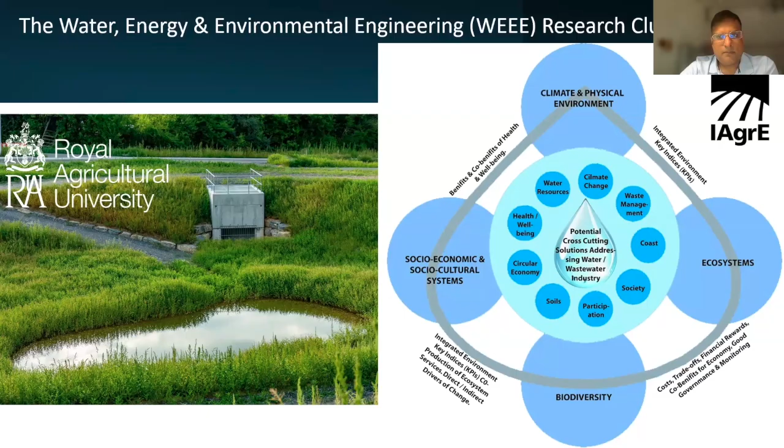So 2.5 years ago, I joined the Royal Ag alongside my post with WRC, and I set up the Water, Energy and Environmental Engineering Research Cluster with postgraduate and PhD students, specifically looking at how we deal with natural environments, runoff, capture, and the importance of water and wastewater relationships for farms and the farming industry, and how best we can look at it from a circular perspective. A lot of times, that water is captured and conveyed or stored before lorries and trucks pump it away from your on-farm produced water on site.

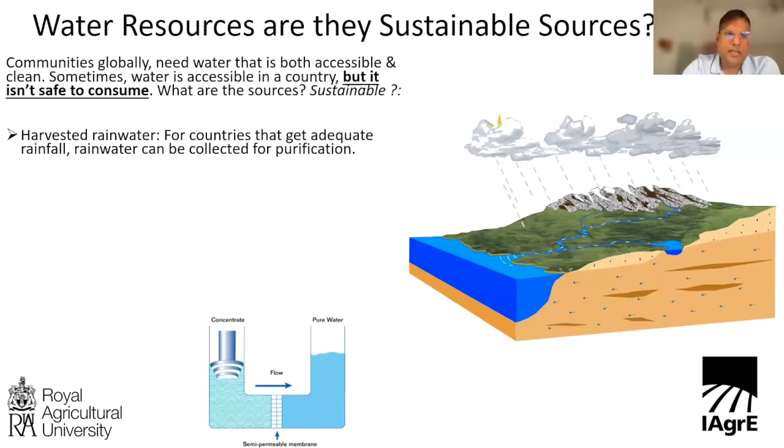It's not working. So you have to look at more realistic ways of providing that water resource sustainably. And in terms of dealing with it, capturing it. Yes, rainwater harvesting is there, but what happens now when you have at least 2 weeks of non-precipitation levels? The reliability is questioned. Capturing that from other sources, so the wastewater coming from, yes, it will be varying levels

of contamination. And for those who look at the very nice fun show, Clarkson's Farm, you would see the farm wastewater has to achieve biological steps in terms of the total coliforms, the fecal coliforms, and the bacteria that must be removed, especially when it's feeding into your poultry farms as well as your dairy farms.

And then there's grey water reuse as well, originating from other aspects, which can also be treated and reused for non-potable consumption and also further treatment for farm water supply. For example, going through detailed filtration and disinfection prior to reuse on farms.

So what happens to the water used in farming and agriculture? Quite often, people don't realize that the agricultural sector uses 70% of fresh water resources globally. So in the UK, that's not the statistic. It's less than 30% from the fresh water supply that goes through to the agricultural sectors.

But when you talk about Canada and the United States, it's closer to 70% of fresh water abstracted for the agricultural industries. And higher percentages from both groundwater abstraction and abstraction from your rivers and so on as well when you talk about India and China.

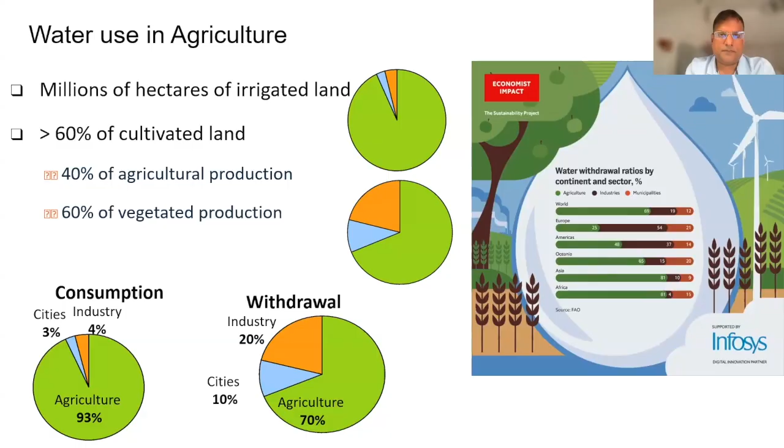versus vegetated produce. And when you look at the pie charts, consumption versus withdrawal, agriculture dominates in most countries, not so much in the UK, but globally, the agricultural sector dominates in terms of the abstraction rates of fresh water resources versus your consumption rates when compared to urban consumption, other industries, etc. So there's an agricultural water challenge for sure, 100%.

And there must be a greater focus on wastewater treatment and wastewater capture for reuse purposes. And when you look at farms for poultry, dairy, and stables with the equine, large volumes of wastewater are nutrient-rich, which can be reused in terms of capturing that phosphorus and nutrients as well. And from a research aspect, there's more to be done when we talk about recovering these valuable resources from a water, food, energy perspective. And some of these challenges, yes, we are experiencing.

Earlier this week on either ITV or BBC, one of the farms in Wales, the farm owner presented that the dairy farm dropped in production of milk from 5,000 liters to 1,000 liters because of the drier conditions. The cows are not accustomed to that, so there's less consumption, but also the growth of hay and other vegetated goods has reduced significantly. So there's a wider societal benefit when we talk about wastewater management and water reuse.

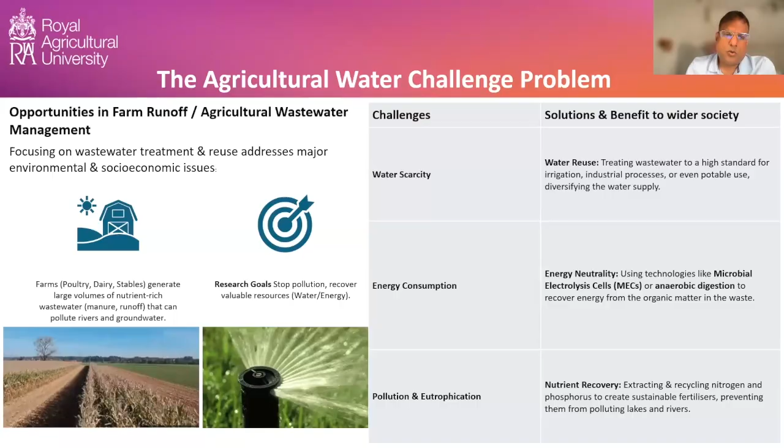And the technologies are improving. And some of the case studies I want to talk about in today's presentation is the use of microbial electrolysis cells and microbial fuel cells, which we are looking at alongside nature-based solutions in terms of treating that wastewater on-site and also creating bioenergy.

So constructed wetlands have been around for a long time, also known as engineered wetlands or engineered hydrosystems, using the natural vegetation, and it's important to not bring foreign species and invasive species when you talk about vegetated and constructed wetlands. So there are a lot of native plants here in the UK and Ireland, and we have been looking for more than 40 years at the applications of surface flow wetlands and subsurface flow wetlands dealing with runoff, especially agricultural runoff.

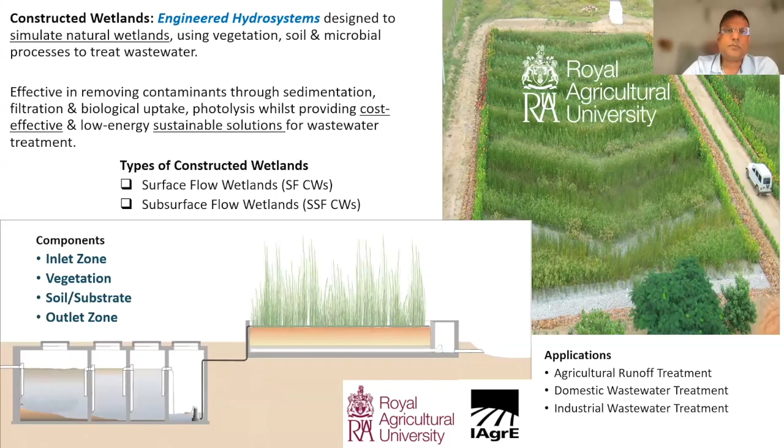So it does work, but there are negatives and positives towards constructed wetlands. And of course, one of the big drawbacks is the land use and land application when it comes to constructed wetlands on farmland. So one of the key focused areas from my water, energy, and environmental engineering research cluster at Royal Ag was looking at decentralized wastewater treatment systems. And in this photo and infographic, you can see a combination from a farm building flowing through different stages for proper reuse.

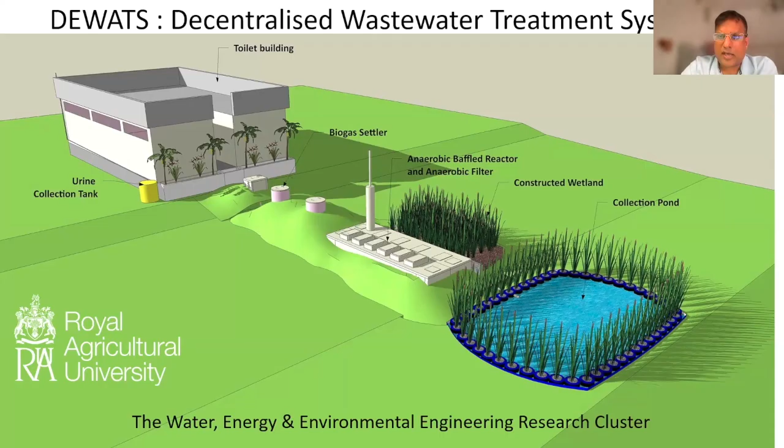And the amount of reduction in your organic matter is in the high 80s to 90% when you have two stages of treatment, as shown on this infographic, a combination of constructed wetlands, biofilters, and also anaerobic digestion systems in terms of the application. But of course, the cost is there, and the land use and land space is another question mark. But these technologies can work, and they reduce the amount of nutrients; they entrap pollutants, both organic and inorganic, within the constructed wetlands and biofilters.

And there are wonderful applications for constructed wetlands, both in vertical flow and horizontal flow mechanisms. A lot of the research that we're looking at is improving the sub-base materials, not using virgin aggregate, but looking more now at biochar and chitosan, which is crushed seafood waste from your crabs and other seashells, ground into a soil or media to act as another filter media within your constructed wetlands or biofilters.

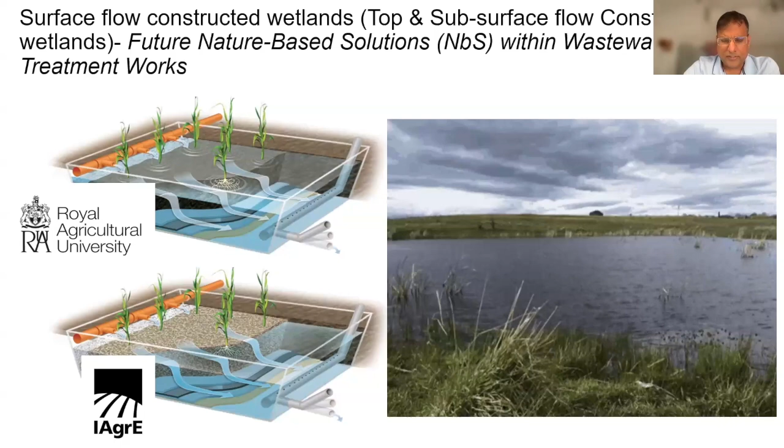So from lab scale to your agricultural fields, I've put a QR code from this research paper, which has supported us in terms of how we look at developing and setting up nature-based solutions on site, capturing that direct runoff. So at lab scale and pilot scale, we've been collecting agricultural runoff and wastewater from 3 farms, including the Kemble Dairy Farm neighboring RAU, and 2 other farms in Wiltshire and Gloucestershire, a poultry farm and another dairy farm close to Swindon.

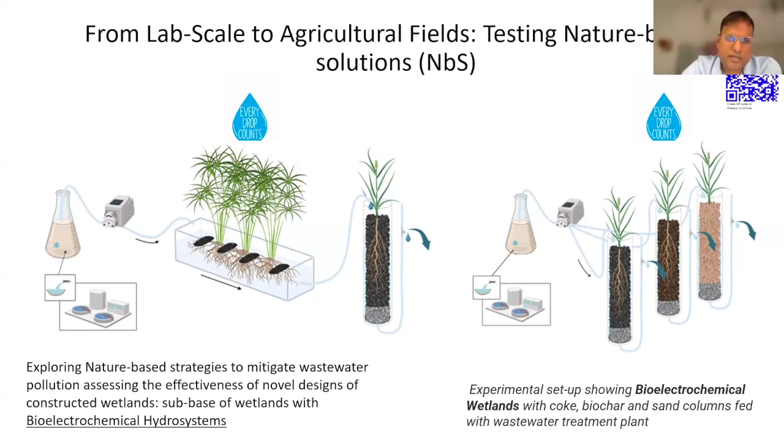And how these systems are feeding various biofilters and constructed wetlands, looking at the plant type, the sub-base material types, the retention time and the flow rates as they feed into your pilot scale and lab scale constructed wetlands and biofilters. So I'm now going to start on a few of the projects that we have been looking at with PhD students over the last 2.5 years.

So Research Project 1 is in collaboration with the University of the West Indies, St. Augustine campus in Trinidad and Tobago, with one of my PhD students. The project focuses on solar power irrigation systems and flowing the wastewater and treated wastewater into a polishing stage of constructed wetlands. Thereafter, the research looks at using this treated wastewater to grow lettuce, kale, and watercress, so 3 salad-type vegetables and crops.

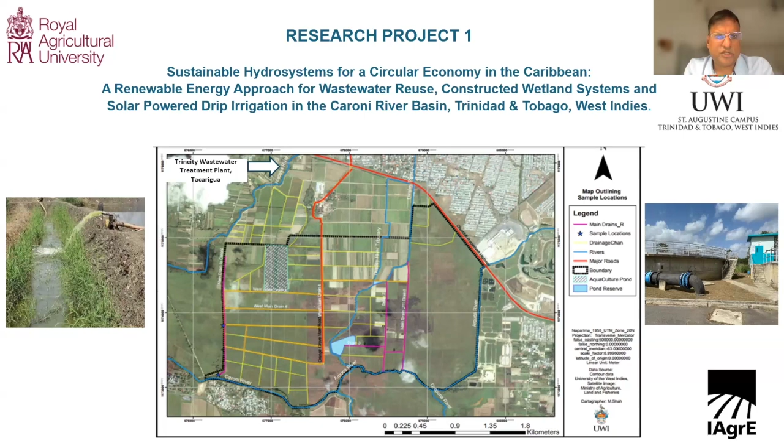So on the right-hand part, you can see the treatment works, the 3rd stage treatment works. The left-hand part shows you a discharge point on site, and in the central picture is the location of the treatment plant in central Trinidad. So the PhD student is looking at a combination of treatment processes. Apologies for the several lines and arrows in this diagram, but I'll try to go through it as easily as possible.

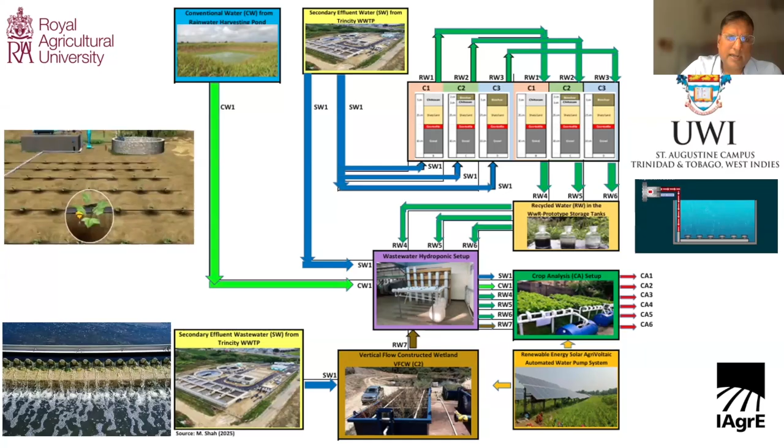And the student is completing the studies within the next few months on the health and safety of consuming that water after 4-stage, 5-stage treatment of domestic wastewater feeding into the constructed wetlands, and then using that water for hydroponics. So it's a hydroponic system in the center light purple picture, and you can see it enlarged there. The center photo is the 4-stage post-constructed wetland feeding the hydroponics, and that hydroponic system is being used to grow the lettuce, kale, and watercress.

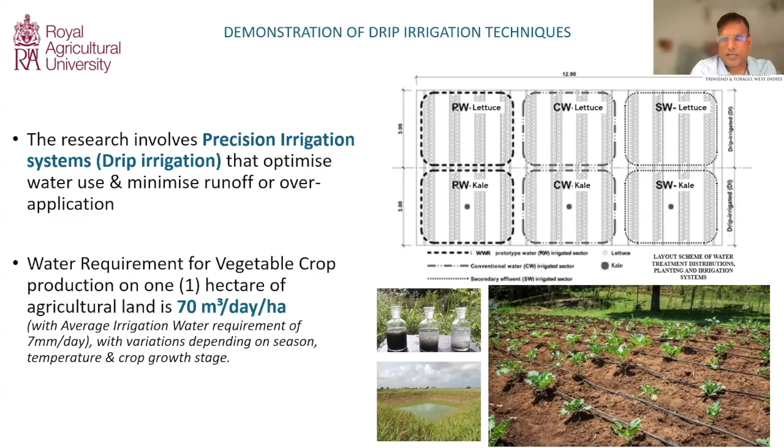So both physical, chemical, and biological water with wastewater analysis. So the project also looks at precision irrigation with drip irrigation to the system, and the water requirements for each vegetable crop, looking at per 1 hectare of agricultural land is around 70 meter cube of water per day per hectare. So an average irrigation flow is about 7 millimeters per day in terms of your rainfall measurement, with a lot of variations depending on the season type and crop type that you're looking to grow with these crops.

The second research project with my next student is looking at evaluating again constructed wetlands here in the UK. And we've built up this project at Royal Ag with solar photovoltaics pumping air into the tertiary stages, so increasing the oxygen levels as the wastewater infiltrates and goes through the treatment process. To increase the dissolved oxygen levels would increase the health of the water as well.

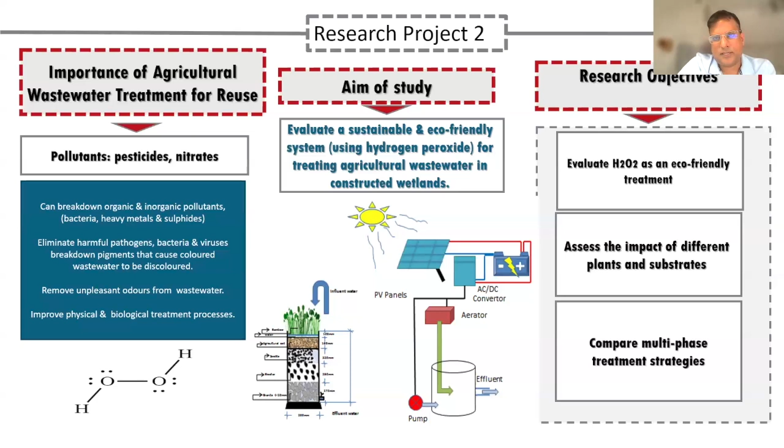And looking at how you can use as a disinfectant at the end, for example, hydrogen peroxide, H2O2, as an eco-friendly treatment process. There's a company called Farm Water, which I've been talking to, where they've looked at the residual with hydrogen peroxide, H2O2. It does not leave back a chlorine residual in it. So you probably still have to look at chlorinating the water when it comes to feeding your horse stables, equine facilities, as well as your dairy farms, etc.

We've looked at vetiver and cattail as some of the plant species for these constructed wetlands, and we've had sensors monitoring the total suspended solids, the total dissolved solids, pH, conductivity, as well as nitrates, nitrites within the effluent, and doing lab analysis on the biochemical oxygen demand, your BODs, and your chemical oxygen demand on the inflow and outflow of the rigs.

One of the third projects looks at, again, constructed wetlands, and what we've embedded into these constructed wetlands, we've gotten wool, sheep wool from farms in the Cotswold region, and we've used the wool as an organic geotextile membrane. So it's sort of separating, and as some of you will know, in terms of construction and preventing in landfill and so on, you have to have impermeable layers of geotextile. More inorganic materials and plastic-based materials are used for that.

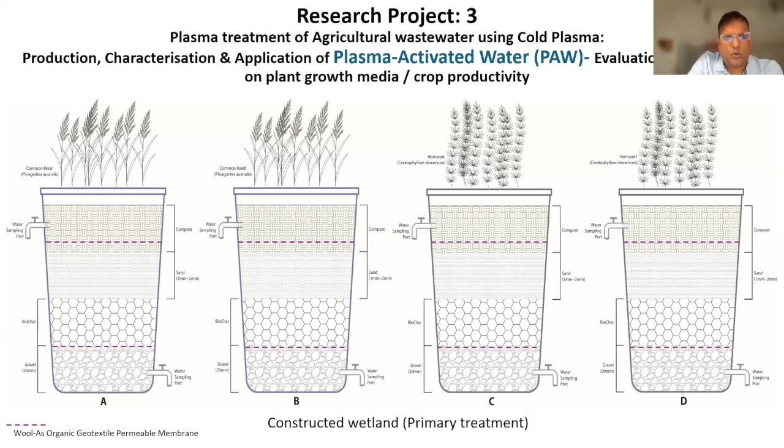And then phase two, with the treated wastewater, we've had some kits with plasma activated water, or PAW, looking at creation of the plasma activated water post-treatment of the constructed wetlands. And the PAW increases the oxidation levels. It sort of creates an O3 ozone kind of configuration in the water. So the plasma activated water is quite good for germinating seeds.

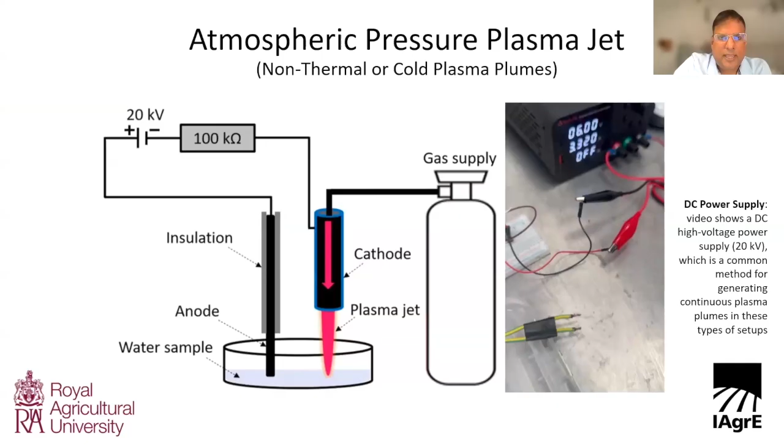So you're using the wastewater, putting it through the constructed wetlands and biofilters, getting that right treatability, and then applying our PAW system, and hopefully this video works. And that's showing you what this system is doing. It's generating, at small levels, you're just talking about 250 mLs of water, but it's creating that plasma activated water from the treated wastewater. And then that plasma activated water we're going to use to germinate seeds and increase those levels. So it's sort of circularity from the wastewater, from the post capture of runoff from farms.

The fourth project is microbial fuel cells. Again, we're capturing wastewater runoff from farms, from the poultry farms, the dairy farms, and the equine stables in and around Wiltshire and Gloucestershire. We're feeding it into a microbial fuel cell. So the microbial fuel cell is a biobattery. And what it does, you have an anode-cathode relationship.

So within the anode, under anaerobic conditions, so no oxygen introduced, and you have a separator called a proton exchange membrane or an ion exchange membrane. And what you're doing, you're creating a biobattery with your microbial fuel cell. So you're feeding it with wastewater to the anode, and you have a combination of graphite used for the anode and cathode; different metals, different materials can be used for the anode and the cathode. You are joining it up with copper wire or titanium wire to create that biobattery, and we are producing bioenergy or electricity.

What the microbial fuel cell is doing is pushing the anions and cations across the proton exchange membrane or the ion exchange membrane to capture and draw your pollutants, your anions and cations, across to create cleaner water.

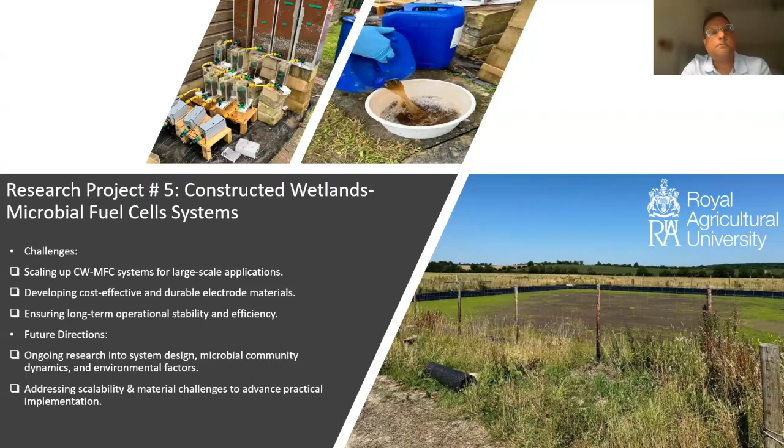So phase 1, at the Royal Ag, myself and my student built up 6 rigs, going through 3 stages of treatment. So constructed wetlands with bamboo. We started with bamboo first as a tropical plant, and then feeding through different stages. With the final effluent, we use solar-powered ultraviolet radiation, and that's us collecting on-site wastewater. So you can see the color and the high turbidity of the farm wastewater.

And to the left, you're seeing the voltage. That's 0.94 volts measured across the constructed wetland with your microbial fuel cell. And this shows you the change of effluents across the inflow and the outflow conditions. So a massive drop in turbidity, total suspended solids, and we achieved about 95 to 100% removal of BOD from the constructed wetlands. I'll just go back one slide.

So in terms of the treatability, you can see the cross-section on the right-hand side, and I'll be sharing these slides with all members of IAgrE. On the right-hand side is the cross-section of our plants. So phase 1, we looked at bamboo, but feedback from the farmers was, well, we're not going to plant bamboo. It's an invasive species. So let's look at willow plants.

So we have been looking at willow plants in phase 2. Wonderful results with the willow plant. Good growth, fantastic conditions, using willow plants and dwarf willow trees within the constructed wetlands. So when you look at the native species here across England and the UK, it's quite a practical solution for constructed wetlands and microbial fuel cell systems.

So when we talk about the water quality, two aspects again: water quality and your energy. So on site, we've had my meters, which include color of the water with my color meter there, the Hanna Checker color meter, turbidity meters, pH meters, and the ion chromatography Hach spectrophotometer, which picked up nitrates, nitrites, phosphates, and ammonia. Alongside our water quality parameters to ensure we're getting the right removal and the right conditions for the World Health Organization, WHO, and other organizations when we talk about the standards for wastewater reuse. And it's been good results thus far.

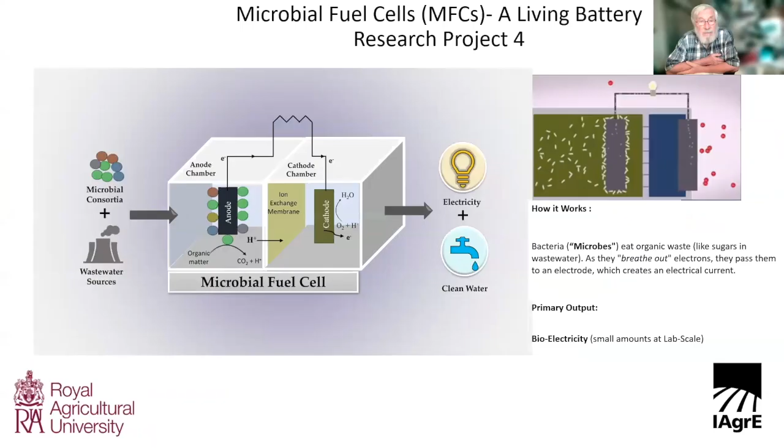You mentioned at the beginning using biochar, and I think it was crushed seashells and things, as a filter medium. Obviously that will get to a state where it stops being effective because it's contaminated. What's your plan to do with that? Meaning when the materials become contaminated. When your filter stops, because your filter at some stage will be contaminated with heavy metals or other metals.

So the options would be backwashing, but when you backwash, you would create that wastewater stream. So you'd have to put that through an additional treatment process, when you backwash the water to clean up the heavy metals and the organics that come through your chitosan and biochar. Very good question, William, because you have to look at the physiochemistry and the biology behind it as well. So there's a lot more research to be done on the chitosan and the biochar, between the performance and even backwashing, what chemical constituents are there, what is happening to the water and what is happening to the materials.

But thereafter, the life cycle of these filters will come to an end. And the solution would obviously be to put it through some sort of process, whether it's some form of incineration or landfill, unfortunately, until you find that solution. Because when the pharmaceutical companies create a chemical, some of them don't magically disappear. It stays entrapped in the filter media. So yes, you're removing microplastics and nanoplastics and heavy metals, but certain things like these microplastics and phosphorus are not going to disappear. They're entrapped within the media itself. So your solution is backwashing to clear it up, which will create that wastewater again, and somebody has to treat that wastewater.

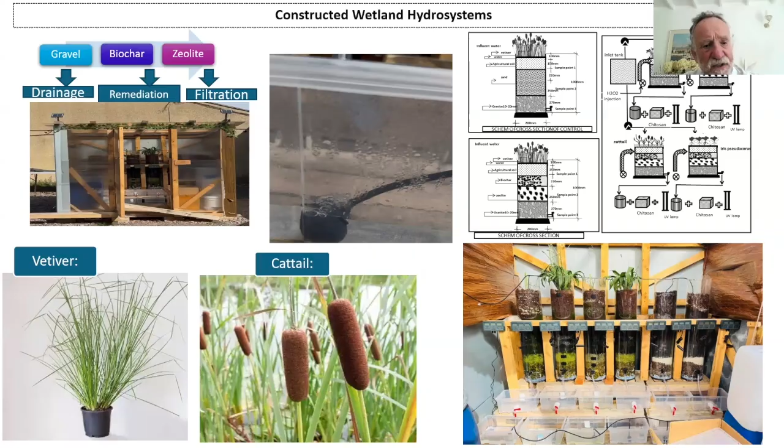Thanks. Okay, Tim Reynolds. Oh, great presentation. Thank you. I got from your last slide, you were suggesting that actually mobile phones can be charged from the cells being generated. How are you actually capturing those currents, with sort of copper meshes within the cell, or so? We have multimeters connected to it.

So it's basically, let me get a better photo. So when you look at the cross section, of the top right hand part, you have a graphite plate separating the top subbase of your garden soils, and another graphite plate in the base, in that dark maroon color. Within the graphite plate, wires are connected like it's an anode and cathode. So it's joined across, and you have your resistor across it. So you created a battery. Yeah. And from that battery, from the voltage and current generated, you can feed it in terms of charging of a phone.

So how much power on, for example, a 100 square meter cell, how much could you actually recover? How much energy would be recovered from that? Oh, you're asking me a tough mathematical question. Let me think now. So, what was quite unique from our measurements, we found that with the increase of the organic matter, meaning how concentrated the COD and the BOD is, we weren't seeing a significant difference in that voltage. So the highest voltage we got was about 0.98 to under 1 volt.

So with each constructed wetland, when you look at it, it's the central picture there, it's probably about 180 centimeters in height. And when we increased the concentration and we saw the higher load coming from the farm, because all of these cells are using real wastewater, so we're not altering anything, we're just collecting that real farm wastewater and pumping it, we've not noticed with a higher organic load an increase in voltage or current.

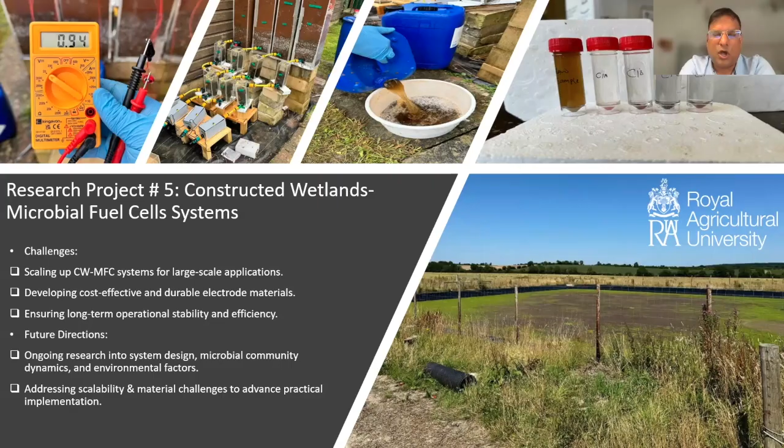For example, a lot of people across the world are looking at biochar as an anode material and a cathode material. So in phase 2 of this project, if I go back a couple of slides to the microbial fuel cell one, we are using biochar and activated carbon in the anode and cathode.

What we found was that we had to create a little cage or netting, like a tea bag, and fill it in, but then we had challenges of corrosion and so on, based on the type of materials we use in the anode and cathode. But if we can use organic materials as an anode and cathode, it's a win-win.

And of course you would be well aware of biochar coming from different sources as a waste product as well. So there is research going on asking: can we use organic waste products as an anode and cathode to embed further circularity into the microbial fuel cell system?

Cheers, thank you. You're welcome.

Okay, a question from myself. I saw a project maybe 3 or 4 years ago in South Wales on a farm where they were taking slurry, extracting the solid matter, and then treating that water to a point where it could be refed to livestock. So not just waste, actually cleaning it and rehydrating cattle with it. Do you know if anybody's doing that commercially yet, or is that still research?